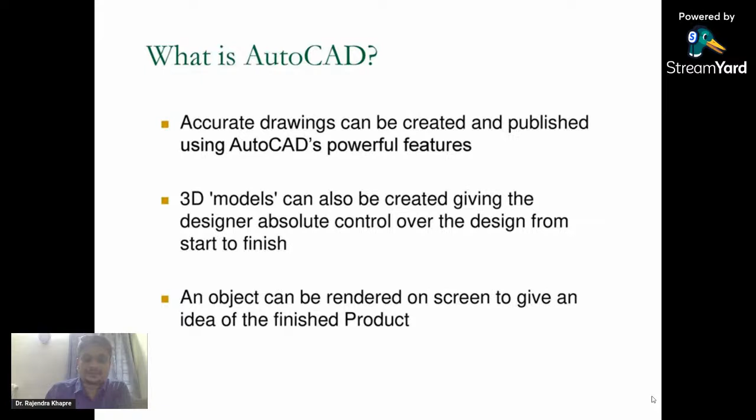Initially it was used for mechanical, electrical, and civil engineering, and later it started being used by architects, aeronautical engineers, and many other disciplines. Accurate technical drawings can be drawn using AutoCAD. The older versions were used only for preparing 2D drawings, but the newer versions now allow us to create 3D models and even rendered views of three-dimensional objects. So I don't have to explain much, because everybody is well conversant with AutoCAD software.

You create your account using your own college ID or maybe even personal ID. And once your ID is approved, you have to upload your ID card also. Your institute ID card has to be uploaded, and once your ID card is approved, you can access many of the softwares which are freely available for students and educators.

Here you will find the download software option, and once you go to that particular window, you will be navigated to a software download window where you can actually download the AutoCAD software in different versions, maybe 2022, 23, or even older versions. This particular version is available only for a couple of years, and after that you may have to uninstall it and install the latest version of your AutoCAD software.

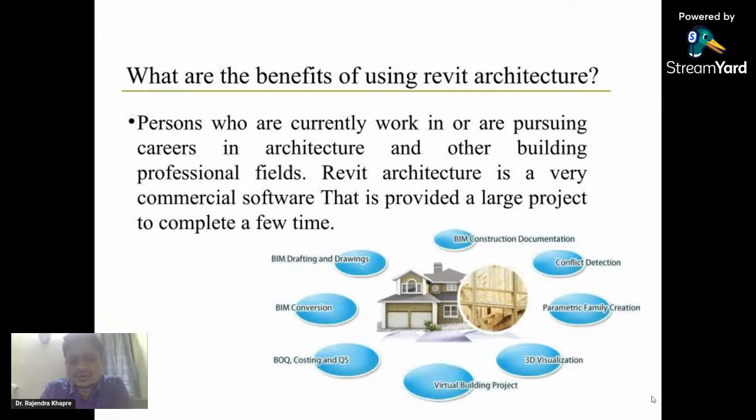Now, what is Revit? I'm sure everybody is aware of this. Revit architecture is a robust architecture design and documentation software created by Autodesk for architecture design and the building profession. Like I said earlier, it works on a platform of BIM, that is Building Information Modeling. In this figure you can see various activities combined under one roof, that is construction documentation, conflict detection, and many more, 3D visualization, virtual building projects. All these are combined into a single software called Revit architecture.

Apart from this, there are some popular softwares related to project management. One is MS Project, and the second one is Primavera. Both the softwares serve almost a similar purpose, that is managing projects. If you talk about MS Project and Primavera, they are basically project management software, and it can be used for a construction project, a small project, or even a big project.

If I talk about Microsoft Project, like I said, it's a project management software developed by a company called Microsoft, and it is designed to assist the project manager in developing plans, assigning resources to tasks, tracking the process or progress, managing the budget, analyzing the workload, and so on.

Now, Primavera also works on a similar platform. For planning the project, you have to define the goals, develop the tasks, establish the timeline, and organize resource availability. Accordingly, the project timeline is defined.

Now coming to the other area, that is hydraulic engineering. Bentley has a bunch of softwares, starting from WaterGEMS, WaterCAD, WaterHammer, SewerGEMS, SewerCAD, CivilStorm, StormCAD, PondPack, and Culvert Master. These are under the umbrella of Bentley, and there are other softwares like EPANET, Branch, Sewer, and Loop. These are the older versions of hydraulic engineering softwares, but nowadays most of the time we'll find WaterGEMS and SewerGEMS in the field. They are very frequently used for the development of water pipelines.

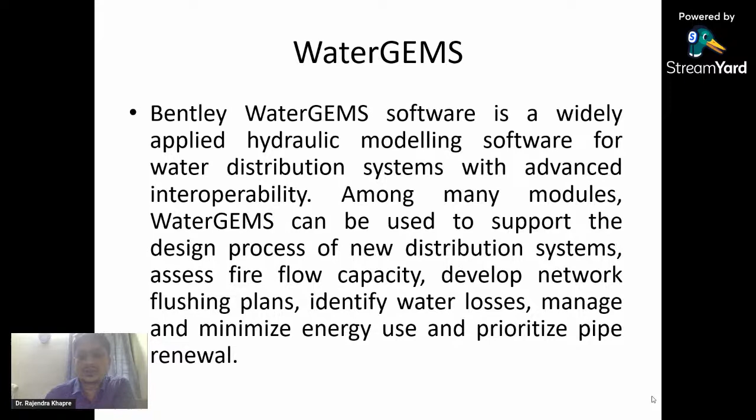Let us talk about WaterGEMS. It is developed by a company called Bentley, and it is widely used for hydraulic modeling, especially the water distribution system, and it has got advanced interoperability. We can plan the water distribution system right from a small village to a large city using this particular software.

This particular software has a very good interface, and it has good integration with other softwares like AutoCAD. Even it has got integration with ArcGIS, and even with MicroStation also. This can be integrated where you can take data from all these softwares, and it can be analyzed in this particular WaterGEMS software.

The next area is soil engineering. In soil engineering, Plaxis software is very popular, and it has two options: Plaxis 2D and Plaxis 3D. Unfortunately, this software is very expensive. Initially it was a property of Plaxis itself, an independent software, but recently Bentley has acquired it. So if you want to purchase this, you can purchase it from Bentley, and it has a very wide range of applications as far as soil engineering is concerned.

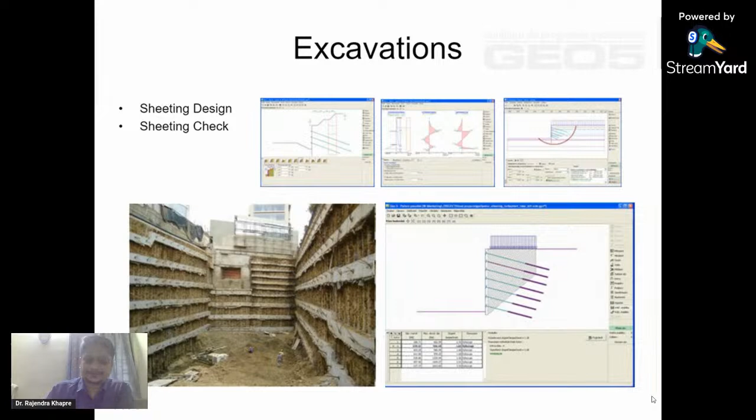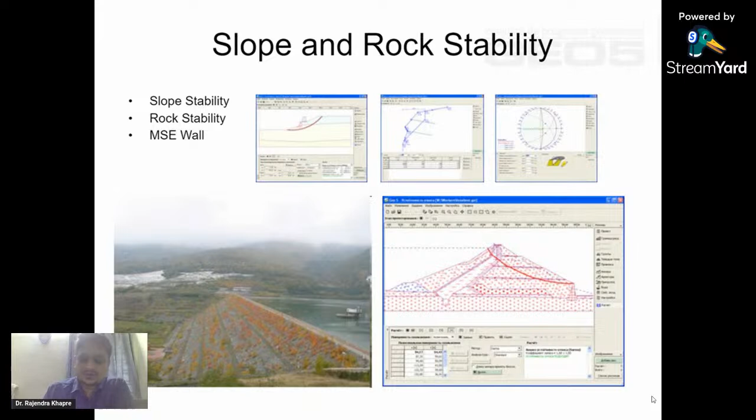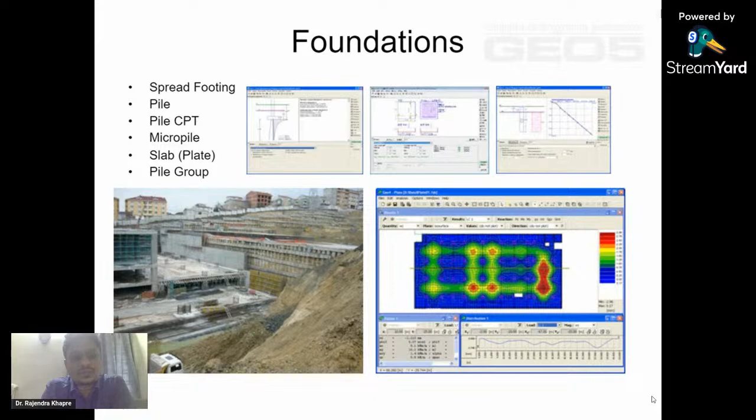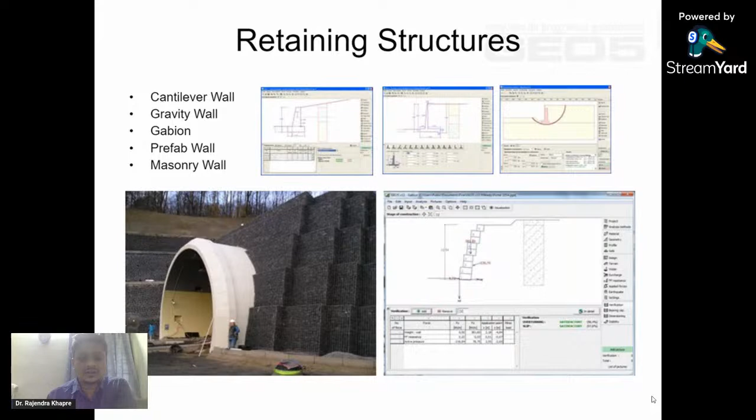Then the retaining module of Geo5 is capable of analyzing and designing cantilever walls, gravity walls, gabion walls, and masonry walls, and so on. You can see in this picture a typical retaining wall designed using this software. Then this reinforced slope can also be designed using this particular feature. MSE wall is one type of wall which can be seen in this picture.

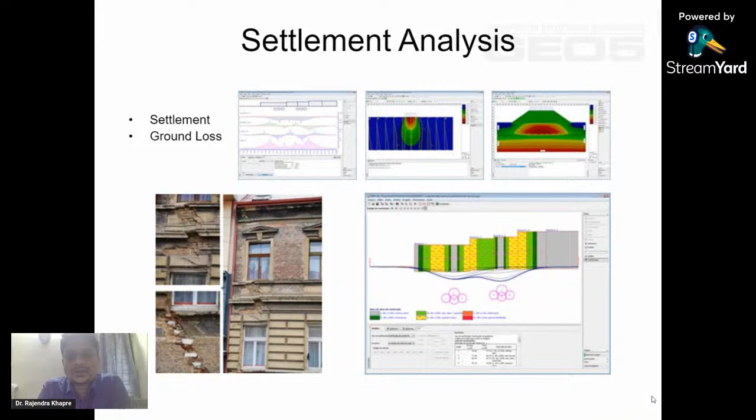Then settlement analysis: due to uneven loading or maybe uneven properties of the soil, there is a possibility of settlement. This settlement analysis can also be done using this particular model called settlement analysis in Geo5.

Now, the most popular softwares used in civil engineering are the structural analysis and design softwares. There are many softwares available in the market, and every software has its own features. To name a few, we have SAP, STAAD.Pro, MIDAS, and ETABS. These are four popular softwares used in India as well as abroad.

Now, if we talk about SAP, that stands for Structural Analysis Program, which is developed by a company called CSI. This particular software has the capability of analysis as well as design of various concrete structures as well as steel structures, well within the permissible limits, and that too as per the latest IS codes.

STAAD.Pro, yes, of course, everyone knows what is STAAD.Pro. It has a very long history over the world. Initially this software was developed by a company called Research Engineers, and during those days the software security was given by a company called Bentley in terms of a hardware lock. Later on, Bentley acquired STAAD.Pro, and slowly Bentley has been acquiring many civil engineering softwares. So in the coming slides, I'll show you what softwares are available under the umbrella of Bentley.

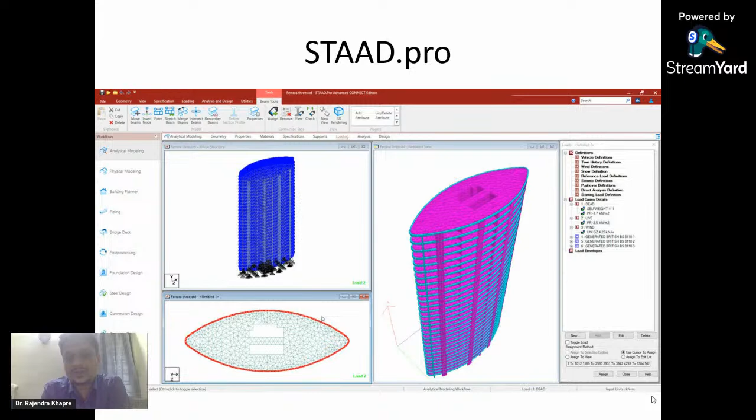To talk about STAAD.Pro, the latest version is the Connect Edition. The previous edition was STAAD.Pro V8i, and this software is very widely used over the entire world. It supports many standard codes, including the steel code and of course RCC code. Apart from that, in some countries aluminum and timber codes are also available. So with this software you can design any building using any of the codes, like the Australian code or American code. All those codes are included, and this software has a very good interface. There are many videos available under the Bentley Learn platform, which I'll show you in the coming slides.

Another software is Midas, which is mostly used in India. This is also a very good software, giving correct results, and it is widely used in regions like Mumbai and Delhi.

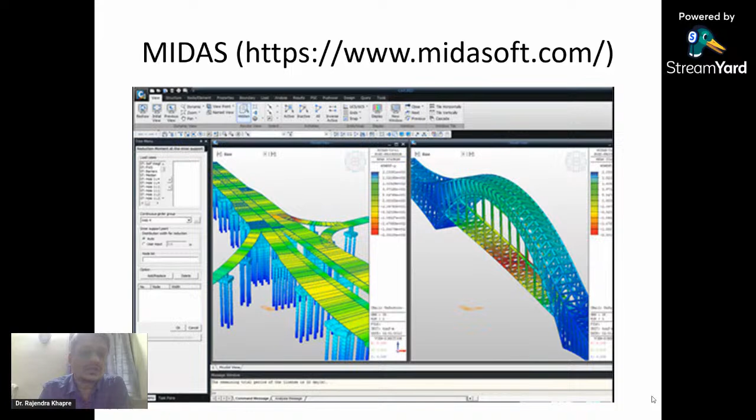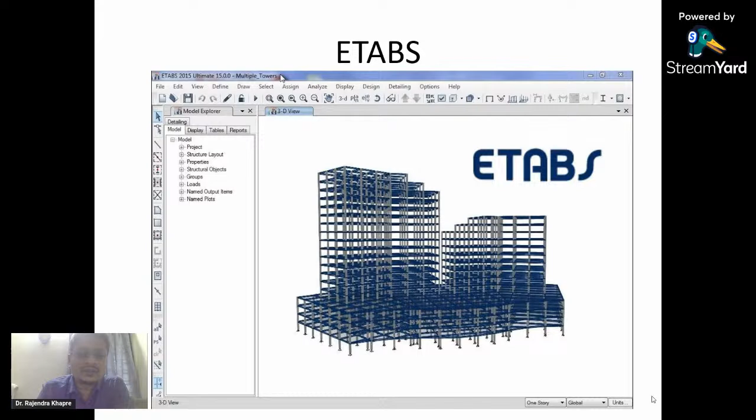Then we have another software called ETABS. ETABS is also developed by a company called CSI, and SAP and ETABS follow almost similar interface. So if you know SAP, you can work on ETABS very easily, and ETABS gives very good results as far as building design is concerned. Whereas STAAD.pro can be used for almost anything. For building design, I'll recommend ETABS, which is very popular in India and gaining popularity abroad too.

Now, this is all about typical RCC or steel analysis and design. When we come to special structures, we have to use a method called finite element analysis. There are many softwares available for this. Even STAAD.pro has a module for finite element analysis, but it has very limited capabilities. To have detailed analysis, you have to use dedicated finite element analysis software.

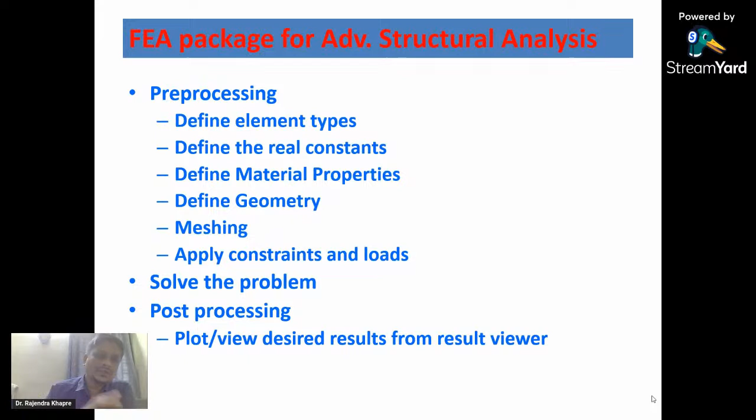There are plenty of softwares like Lusas, Abaqus, ANSYS for advanced structural analysis. I'm comfortable with ANSYS, so let me share some of its best features, most of which are also available in other softwares. Like any finite element analysis, we have to follow a certain process: define the elements, real constants, geometry, material properties, meshing, and then solve the problem. This is the typical structure of any finite element analysis program.

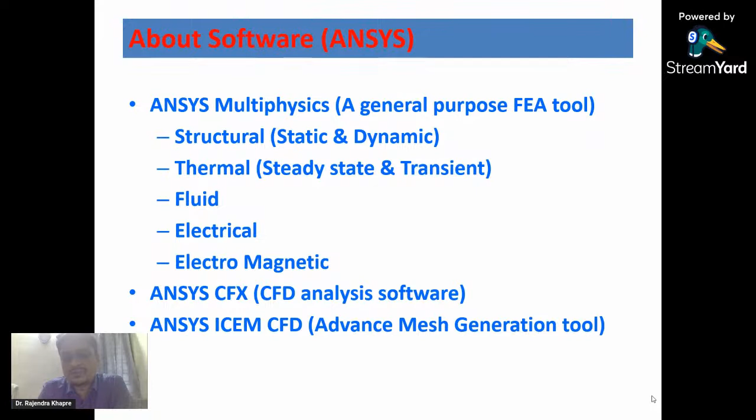Now ANSYS has the capability of analyzing multi-physics problems. This means it can do static and dynamic analysis at the same time, then static with thermal, static with fluid, dynamic with electrical. So combined analysis can be done over here. I'll give you an example in the coming slides of MEMS, that is micro electromechanical analysis.

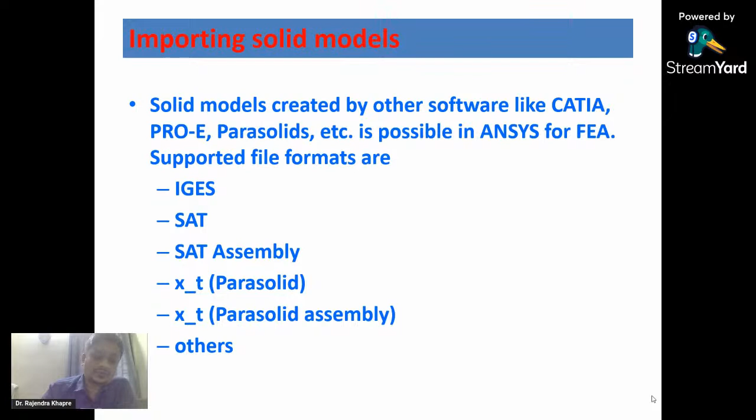There are different analysis and simulation tools available in ANSYS software, like design modeler, meshing feature, design exploration, and many others. These are some softwares which can be easily integrated with ANSYS, like CATIA, Pro-E, Parasolids, where you can create your own geometry and import it into ANSYS, and definitely do further analysis using this.

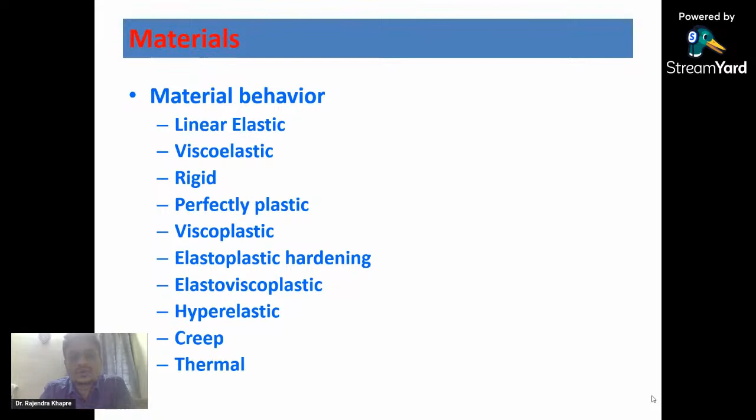Typically, when we talk about analysis, we mostly talk about linear and elastic analysis, where the material is usually considered elastic and the behavior is linear. But there are many different material behaviors we may have to deal with when doing research, like viscoelastic, rigid, perfectly plastic, viscoplastic, hyperelastic, thermal. All these material behaviors are available in the software called ANSYS.

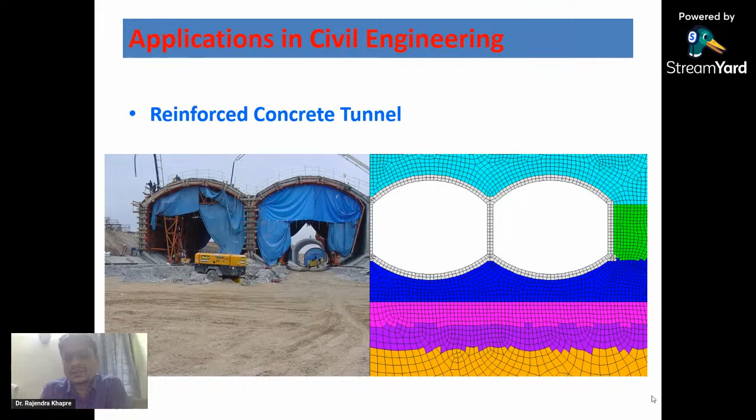Now these are some finite element analyses done using ANSYS. Here you can see a reinforced concrete tunnel, and on the yellow side that's a rock, pink color is different soil, blue color is filling, and white color is concrete. So different material properties are analyzed in this particular figure.

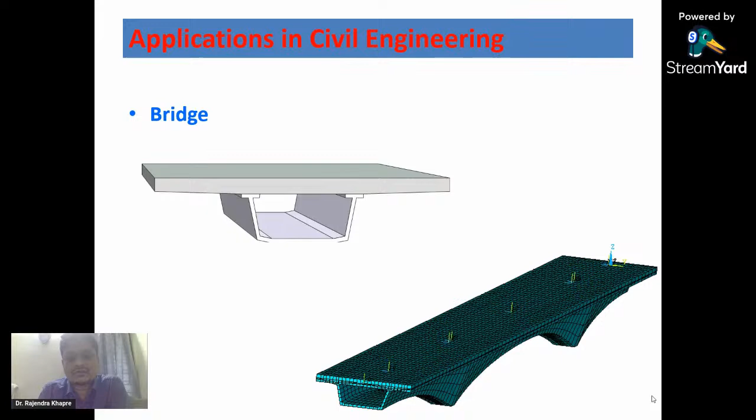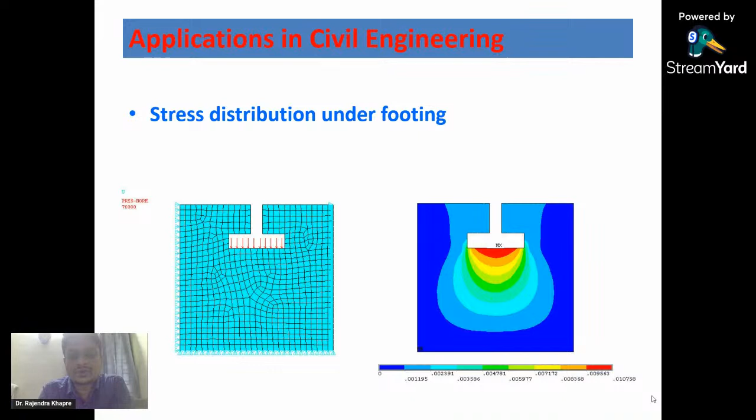We can even have soil analysis in this particular software. Like in Geo5 we can do this analysis, the same can be done over here. There are different soil models available in this software, using different soil models, like the Mohr-Coulomb model. In this Mohr-Coulomb model we can have the pressure distribution under the foundation. So this is one example.

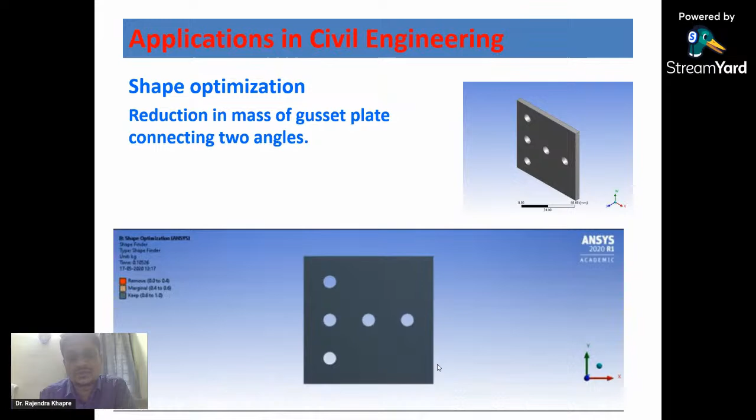We can have a plate something like this, and the corners can be removed, but still the structure will be safe, and the weight of the structure will be reduced.

We can even analyze complex structures like castellated beams, where we have a steel section with some openings made to pass ducts, pipelines, or maybe water. IS code does not give a design procedure for such members, so we can do an analysis and see how the structure is behaving. We can even model the reinforcement in this particular structure.

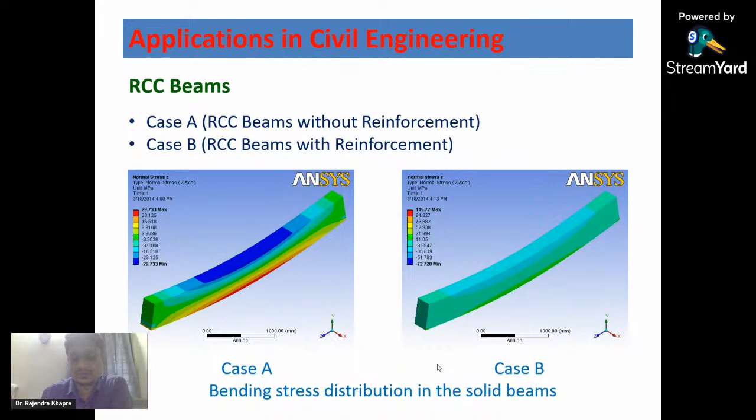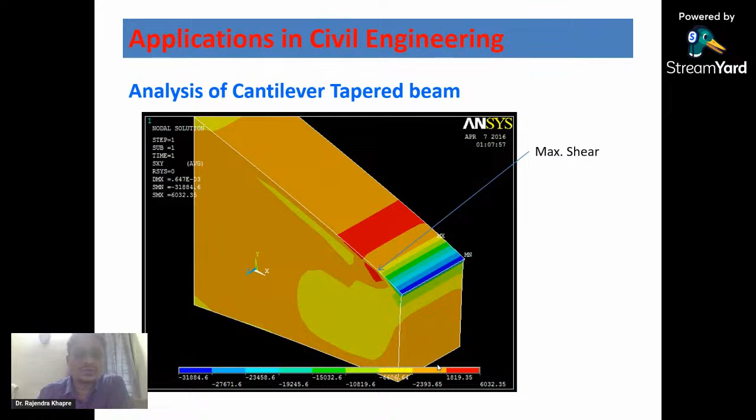Then some special cases like cantilever beams, or deep beams I should say. Especially in deep beams, usually it is considered that the maximum amount of shear is coming at the support, isn't it? But if you consider the deep beam, you will find that the location of maximum shear has shifted. This analysis is possible only using a finite element package.

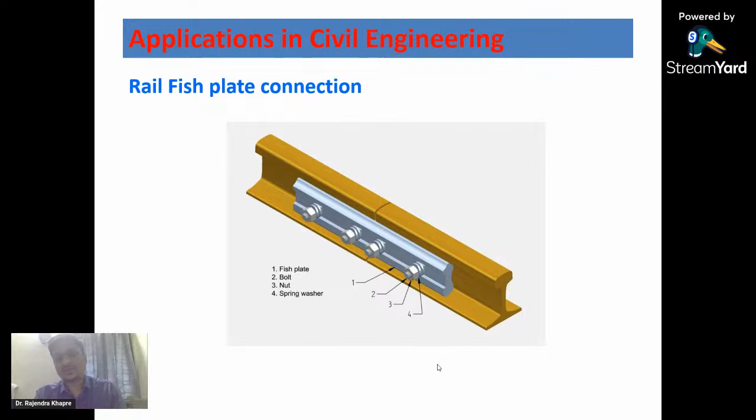Now, if you want to analyze a complex shape like a rail fish plate connection, the one shown in silver color - this is a typical plate used to join two rails, and due to the influence of load, this will be subjected to high amounts of stress. Typically there are three types of fish plates used in Indian railways nowadays, and all these are modeled separately.

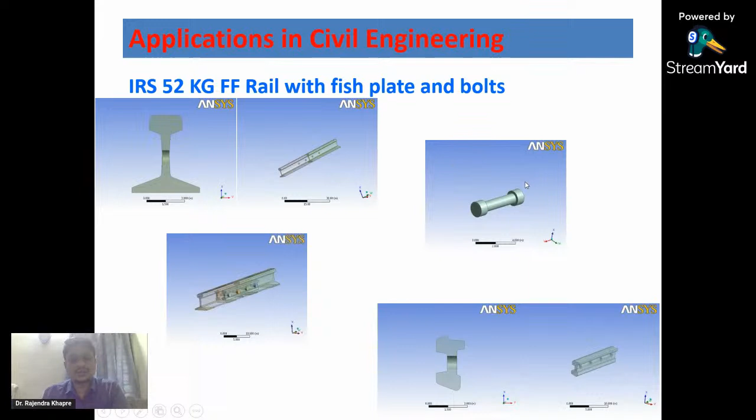Over here we can see this is the rail, this is the fish plate, every nut is there, and this is the complete assembly. This was analyzed for the moving load of the standard rail axle, and you can find a deformation pattern - here you can see the deformation is larger at the joint.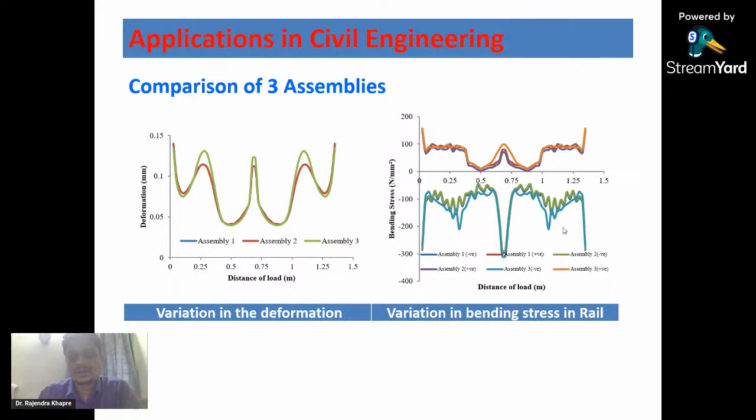Now another interesting part is the thermal analysis. Whenever we are going for mass concreting, where mass concreting means the depth of concrete at the time of casting is probably 0.5 meter and higher - during this case, because of the huge amount of concrete, the heat of hydration generated is also very, very large.

So we have to provide sufficient provision for water inside the body so that the temperature can be controlled. This study can be done for different types of shapes, because different shapes will cause the maximum temperature to act at different locations. If you know the locations, you can put a pipe there and supply cold water so the temperature can be controlled.

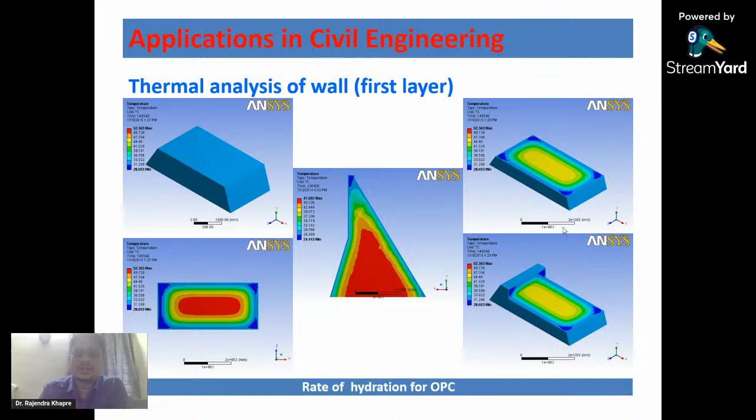Now, another analysis is the thermal analysis of a building, and this is one picture where the building is completely modeled in ANSYS, and it was analyzed for 24 days. You can see there is a significant difference, roughly 8 degrees temperature difference inside and outside the building model.

So you can study this, like for example, if you provide insulation on the northeast side wall, or on the roof, what will be the temperature variation inside the room. Accordingly you can design the insulation - where it has to be kept, what should be the thickness - and the temperature can be controlled. This type of analysis can also be done in this software.

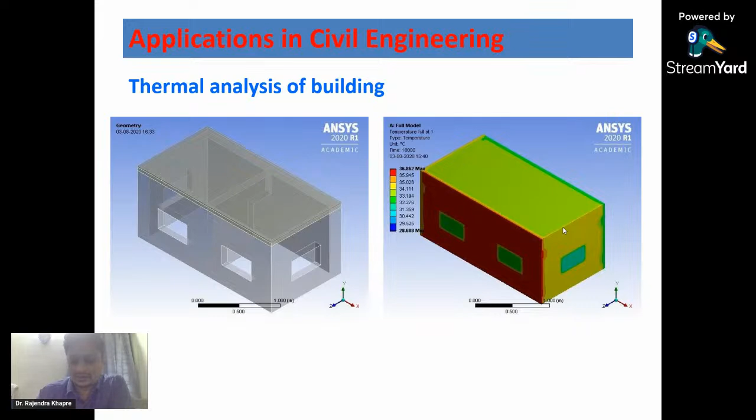Mostly we are dealing with a material which is linear and isotropic in nature, but sometimes we may have to deal with an orthotropic material. So what does orthotropic material mean? The material properties of the given material are different in the x direction, different in the y direction, and different in the z direction. The best example of such a material is ply.

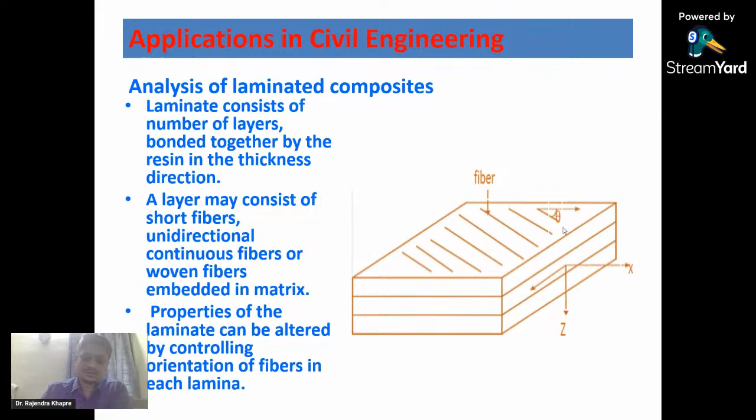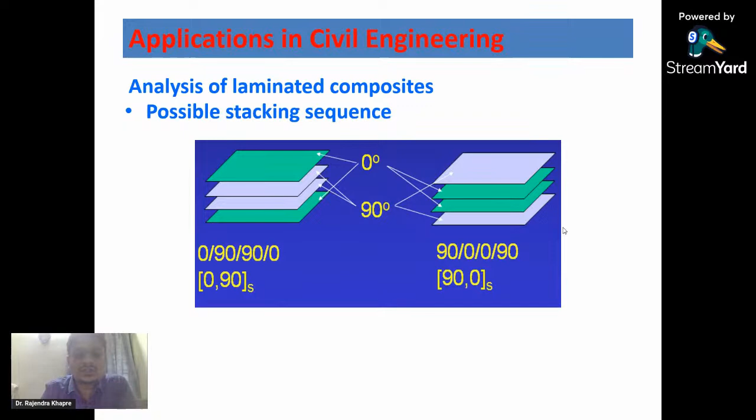The fibers of the material are not in the same direction, they are layered, and the direction of those fibers is different for every layer. In this picture, the green ones show 0 degree, and the white ones show 90 degree. The orientation of these fibers, whether parallel to X or parallel to Y, changes the entire behavior of the structure.

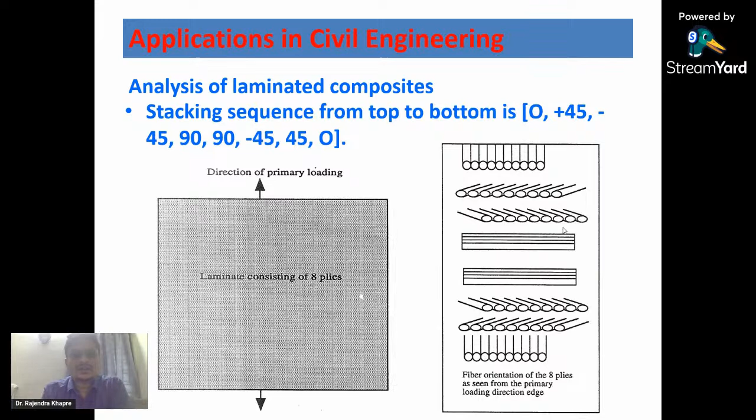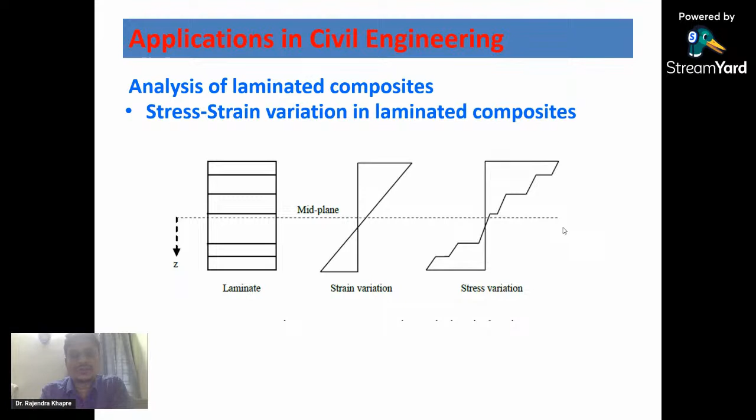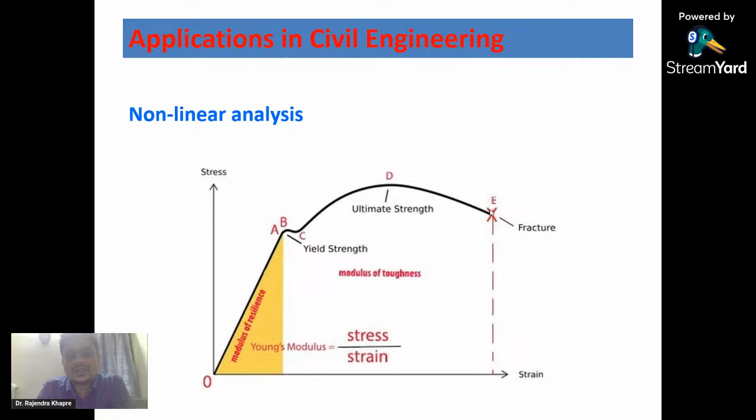Such type of analysis can also be done here. Usually we talk about linear analysis where the stress-strain curve is linear, but in most cases, especially in failure analysis, we may have to cross this linearity and enter the domain of non-linearity, where stress and strain are no longer proportional to each other. On this screen, you can see a typical stress-strain curve for steel, where linearity holds up to the yield strength. Then there is a reduction in strength, followed by an increase, which we call the ultimate strength at point D, and at point E it fractures.

This is a typical representation of the finite element analysis of a bar, which is stretched until it breaks. This is a typical example of a non-linear analysis.

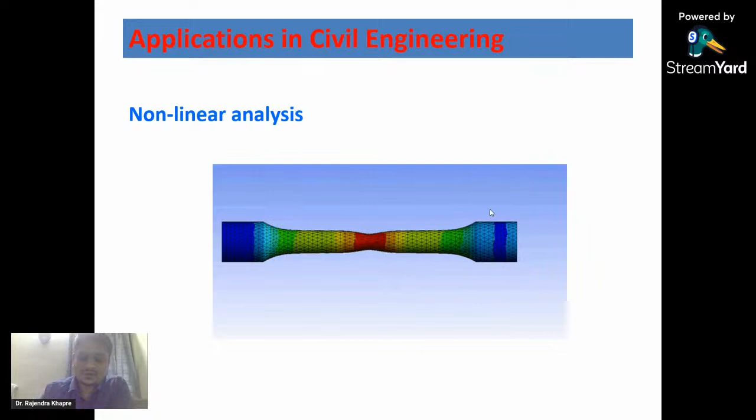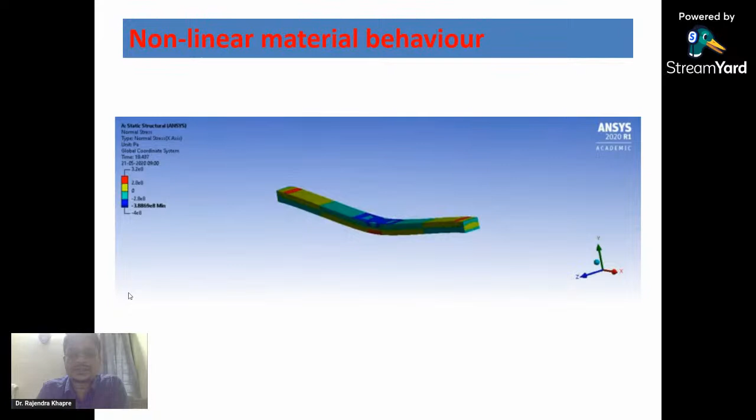Another non-linear analysis is this one. This is a typical beam fixed at both ends, subjected to a concentrated load. Once subjected to concentrated load, under the load there will be a plastic hinge formed. This plastic hinge creates stresses beyond the yield stress, and there will be a permanent deformation at that point, but the rest of the material will remain within the elastic limit.

This is the typical material behavior under nonlinear conditions, especially when we talk about crushing. Here you can see a rectangular tube which was crushed and has become the shape of an 8. This is a circular tube, also crushed, and this circular and rectangular tube is crushed vertically.

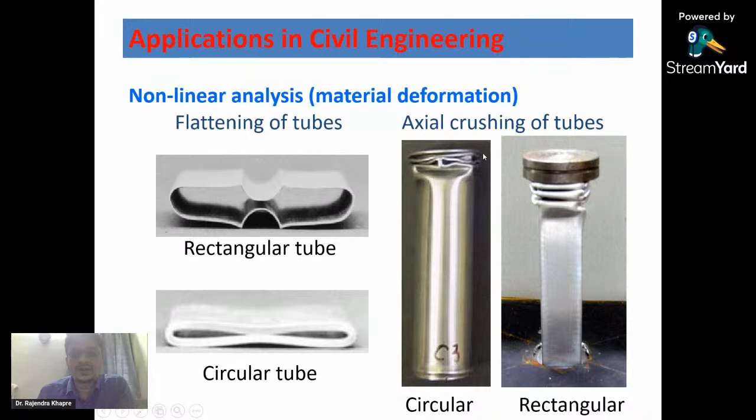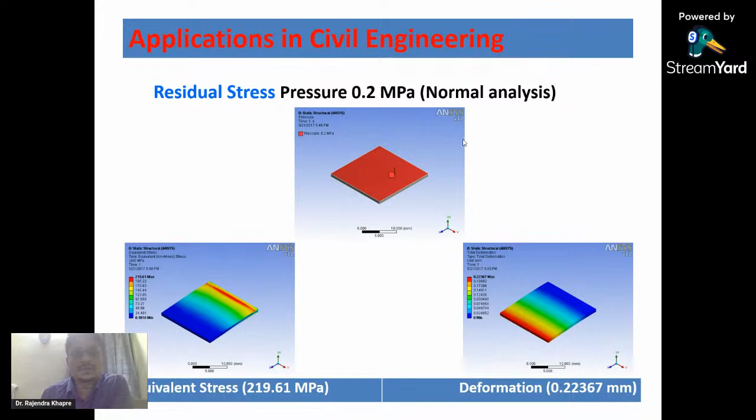Another example is residual stress. If you take a simple cantilever beam, apply a load, and then remove it, it will go back to its original position. But after a certain magnitude of load, it will permanently bend, and some amount of stress will be introduced in that cantilever plate and remain there, not going back to its original position. That is what we call residual stress. We can analyze residual stresses also by using the material nonlinearity option.

This is what I was talking about, the micro electromechanical system, MEMS, and this is the perfect example of multiphysics. In multiphysics, three problems are combined in this case. This is a bar having two different metals: the bottommost is the copper alloy, the top one is the aluminum alloy, and there are three locations, A, B, and C.

At A, we are applying a basic temperature of 30 degrees, and at B and C, there is a difference in voltage. Especially in electronic gadgets like cell phones, there is a huge amount of voltage fluctuation, because at one corner there will be voltage, and at another corner there won't be any voltage. This difference in voltage at two different locations is going to create a rise in temperature. So here the input is voltage, but the output is rise in temperature. These are two different things: voltage is the electronic part, and temperature is the thermal part.

Due to rise in temperature, there will be expansion of the material, and due to expansion, there will be stresses. So here you can see we are dealing with three different physics: one is the electronics, then there is the thermal, and there is the structural. That's why it is called a multi-physics problem.

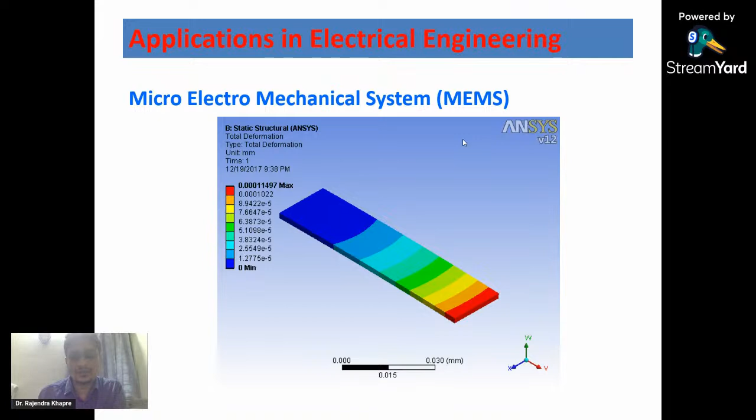Now this finite element analysis is not only limited to structural, thermal, and electrical, it has entered into the world of biomedical engineering also. Many of the biomedical implants can be designed perfectly if you do the finite element analysis correctly.

The simple example is your tooth cap. If you have a tooth cap model available with you, definitely you can go for the structural analysis of this tooth cap, and you can see whether it is able to sustain the given loading or not. That can be easily analyzed using a finite element software.

Another example is your bones, like especially in some accidental cases, the bones are fractured. Sometimes you may have to replace the bone, and sometimes you may have to go for attachment of plates. So we can have the analysis of this attachment of plates, and maybe a dynamic analysis using ANSYS for the femur bone, and we can see how this bone is going to distribute the stresses over the body.

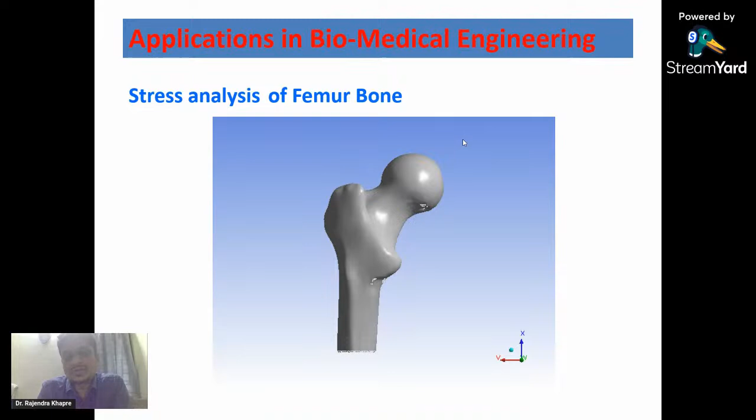Just imagine some construction is going on, and heavy construction material is falling on the slab. Although your slab is designed for a certain load, due to the impact, this load is increased tremendously, and you may find there is damage in the slab. Such type of analysis can be done, and we can see whether the slab will sustain the external loading or not.

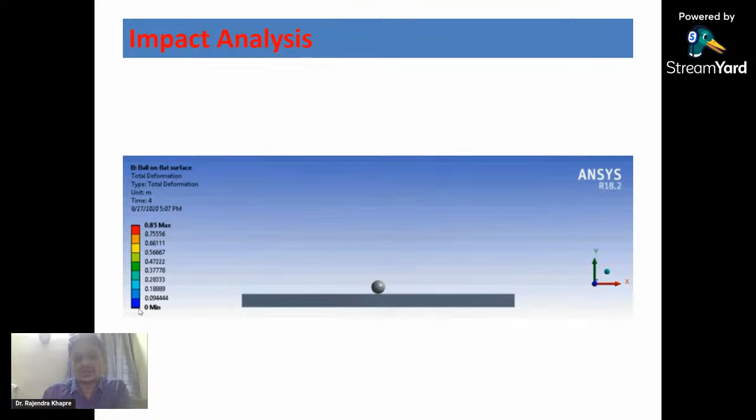Apart from this, we have a buckling problem. For example, if you see this particular column, under the application of the vertical load, it should behave like this—it should compress axially. But in practice, it starts buckling because there is a difference in the moment of inertia along the x-axis and y-axis. So in place of axial compression, you will find there is buckling.

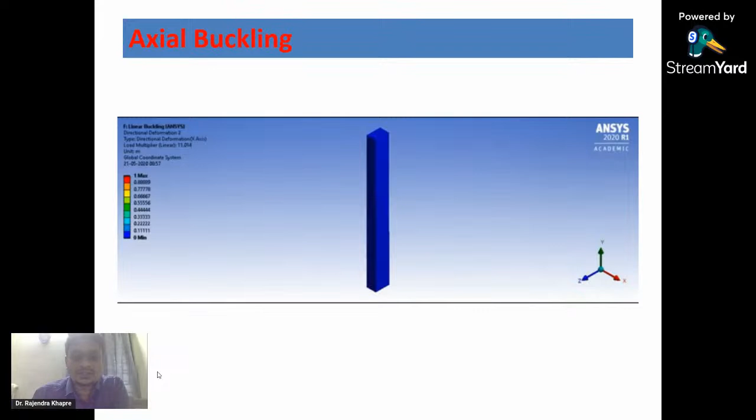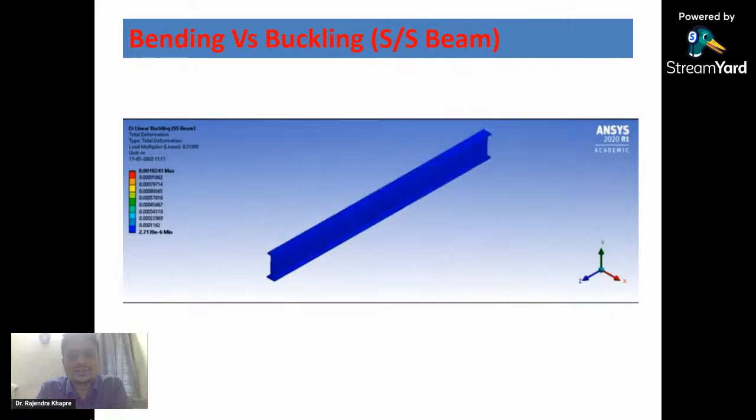These are the real life problems which can be analyzed here. Another example is the buckling of the I-section. Ideally the I-section should behave like this, but actually it is behaving like this. This is what we call buckling.

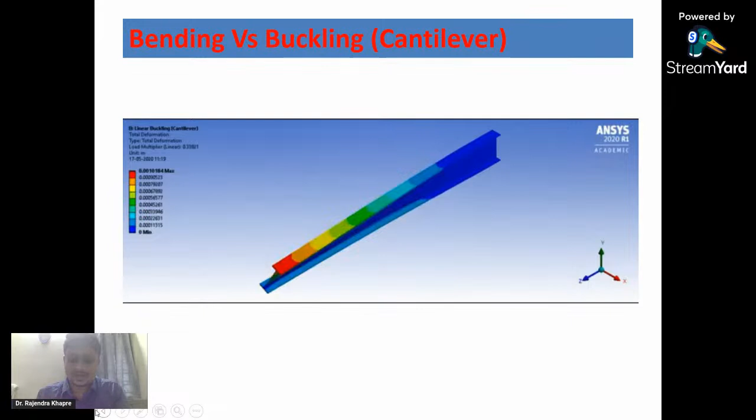Another example of buckling is your cantilever. You can see the cantilever should behave like this under the given load, but in real life the I-section is behaving like this under the application of load. It will tend to buckle after a certain amount of load. So this buckling behavior can be analyzed easily using this finite element package.

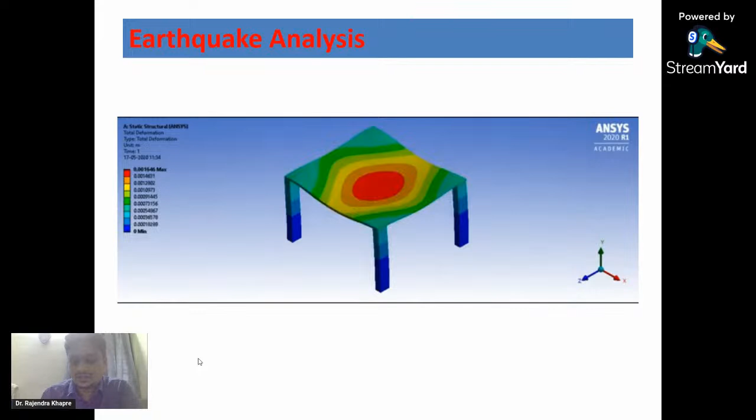Now, earthquake analysis—yes, of course, STAAD.Pro, ETABS, and everything is okay. But here also you can have the analysis which is subjected to earthquake loading. So we just have to give the proper input, and we can see the structure dancing at various frequencies.

So in harmonic analysis, you can see this is a typical plate which is moving in the vertical direction. And then the second mode shape is like this.

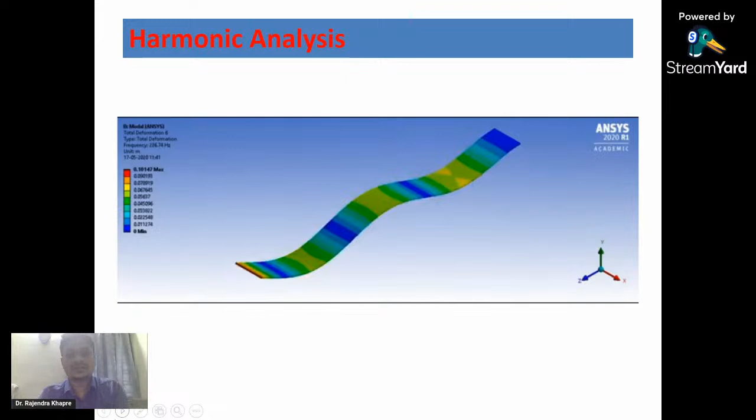Basically what happens is when the frequency of the load and the frequency of the structure match, resonance is created. Due to resonance, the deformation caused by external loading is increased tremendously. So we can do this analysis and find how much resonance is there, what is the natural frequency, and what will be the maximum deformation, especially in case of resonance, for different frequencies.

Now, this is something new, because till now we were designing buildings for different types of loads, maybe self-weight, live load, thermal load, wind load, earthquake load, and so on. But nowadays, this impact load, especially due to explosion, is coming into picture. This can be a disaster like the Beirut explosion, or a man-made disaster like a missile explosion.

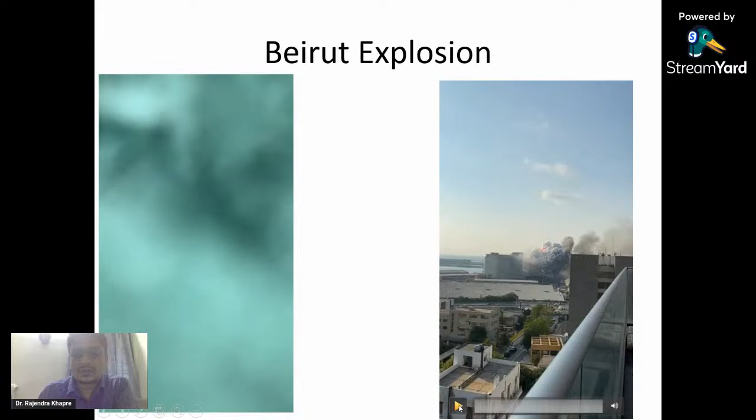So let me play this video for you. Here you can see there was ammonium nitrate which was stored in a storage facility, and it got exploded due to the fire. I think this event happened during the COVID period, probably in 2020.

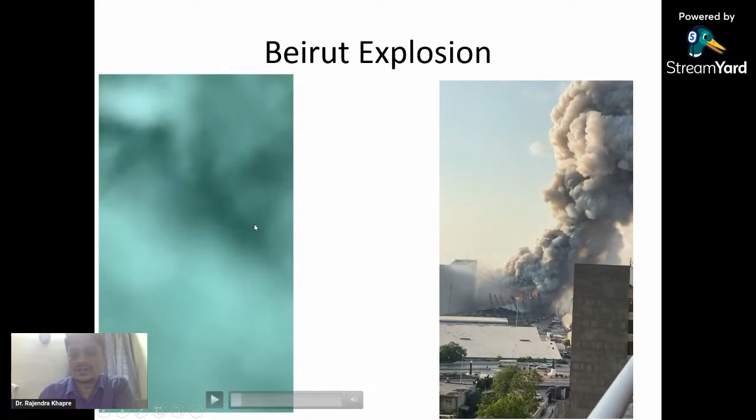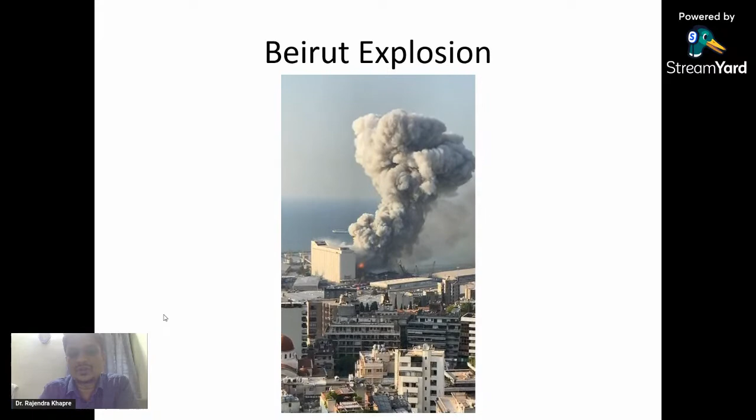This explosion happened, and the entire world witnessed it. The amount of explosion was such that many of the buildings in Beirut city were destroyed. Let me show you another video so you can see the effect of the wave. Just imagine what could have happened to the building next to that storage vessel. You can see there is an actual wave going out due to the explosion.

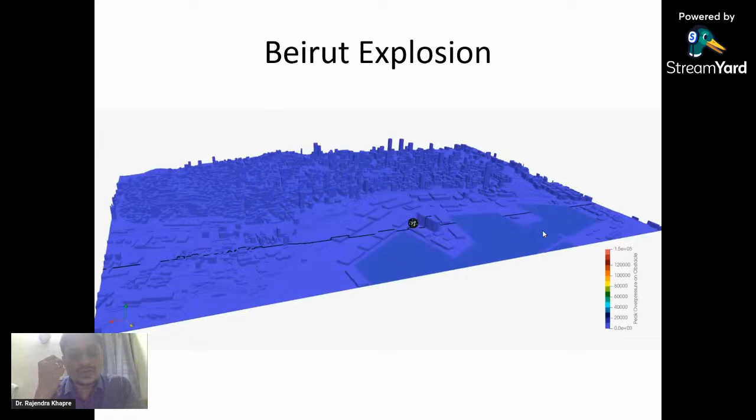We can do this analysis in software, maybe not in ANSYS, but maybe in Abaqus. This is a simulated version of that explosion. You can see the entire city was modeled, and the damage assessment was done due to this explosion.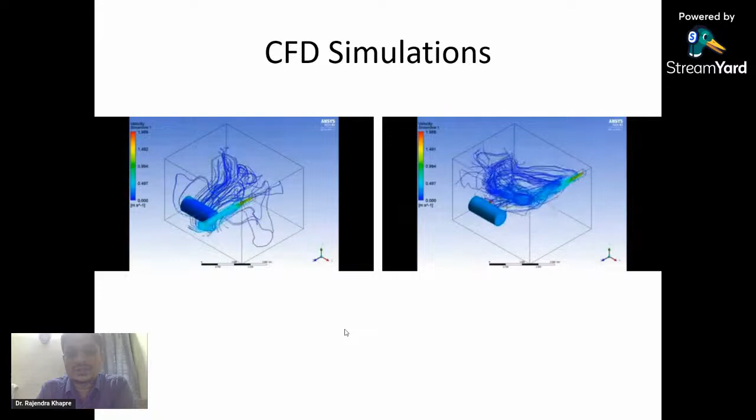So the concepts of CFD come into picture here, and we can do various analyses using fluid, because air is also considered a fluid. So this is one such example.

Now the important part is reality modeling. This is something new. Whenever you want to do analysis on real life problems, you have to create the 3D model of that real problem. There is one such software called Context Capture, developed by Bentley. How this software is used is, you have a specimen or a building, and you can create pictures of that building or specimen from different angles, like A and B, as you can see here.

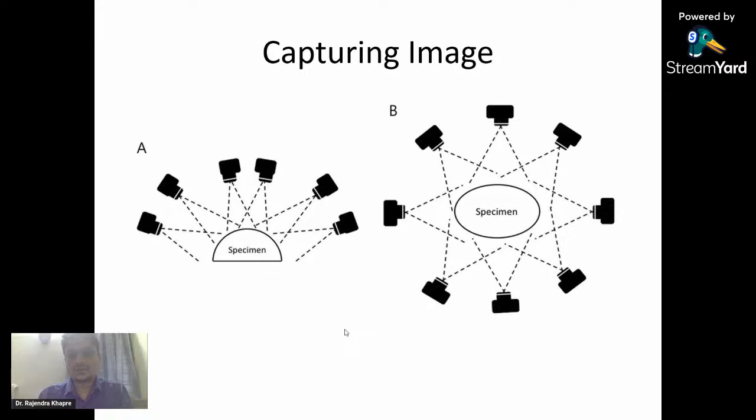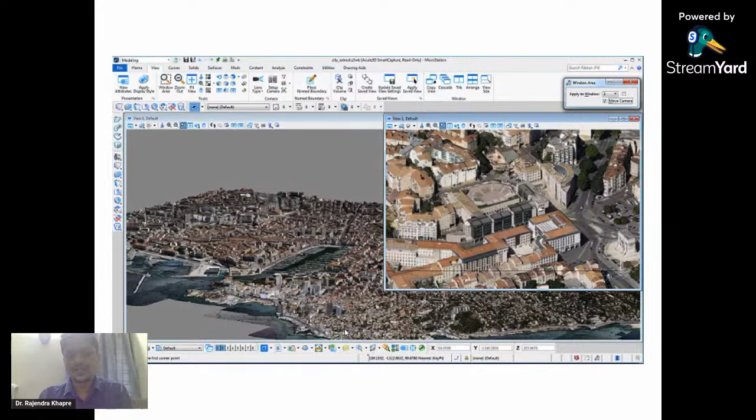Now this software will stitch those pictures and create a 3D model out of it. So this is one 3D model created by Bentley using Context Capture. With the help of a drone or helicopter, various pictures are taken of the entire city, and all those pictures are stitched together to create a 3D model. The best advantage of this 3D model is that you get the correct elevation and correct dimensions of the entire structure.

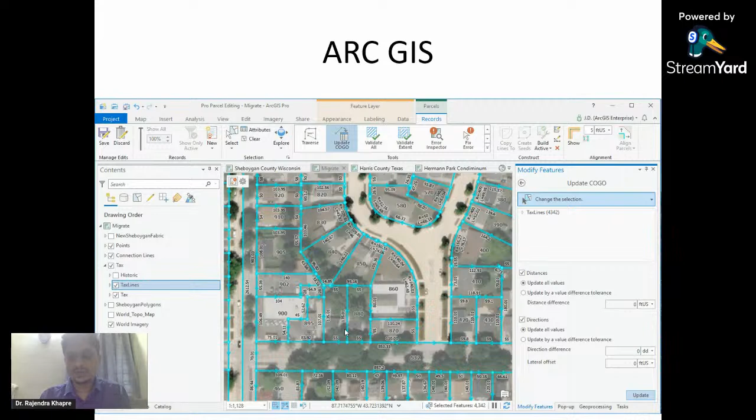The same thing can also be done in a software called ArcGIS. This is very much essential, because nowadays something like the Beirut explosion cannot be simulated unless you have the correct model of the entire building. It is really difficult for us to simulate that otherwise.

Apart from that, Bentley has different software. Like I said, Bentley is the leader in various civil engineering software.

So they are categorized under bridge analysis, probably bridge design. Then we have civil design, with different packages. Then hydraulic and hydrology, which I have already explained. Then mine design, modeling and visualization, offshore analysis, plant design, and reality modeling. And of course the structural analysis where STAAD.pro, STAAD Foundation, and Pro Steel all come into picture.

Now, like I said, Bentley offers many civil engineering softwares. So how to learn them? The simplest way is you go to the Bentley website, education.bentley.com. There you will find a login symbol. You just have to create your ID there, and once your ID is created, you can directly go to the window for students and click get training.

Once you open that, you will find trainings related to various softwares, even on STAAD.pro, then WaterGEMS and many more. You complete that training and you will get a certificate also.

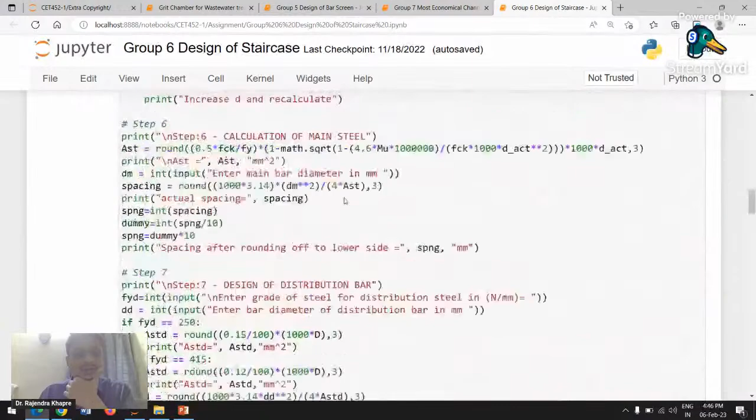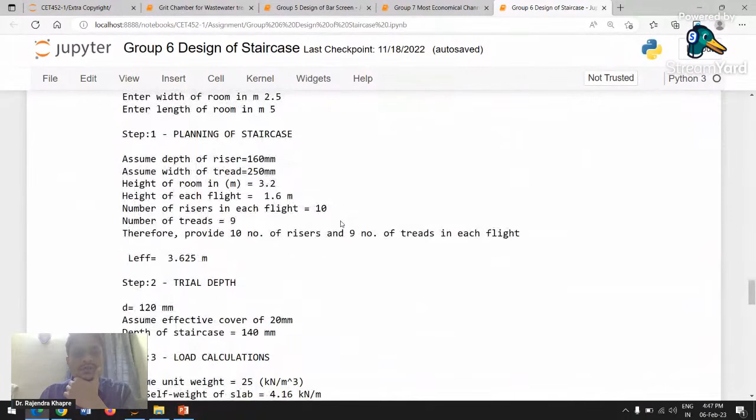So let me quickly show you some Python programs. Here you can see this is a simple Python program developed by a few students, and it is very much similar to a C program. It's a lengthy program, but if you look at the output, traditionally what is expected is the text output—what is the riser, what is the tread, and so on.

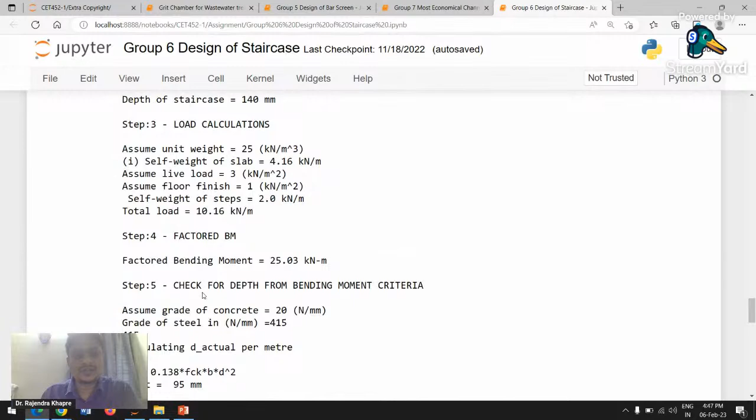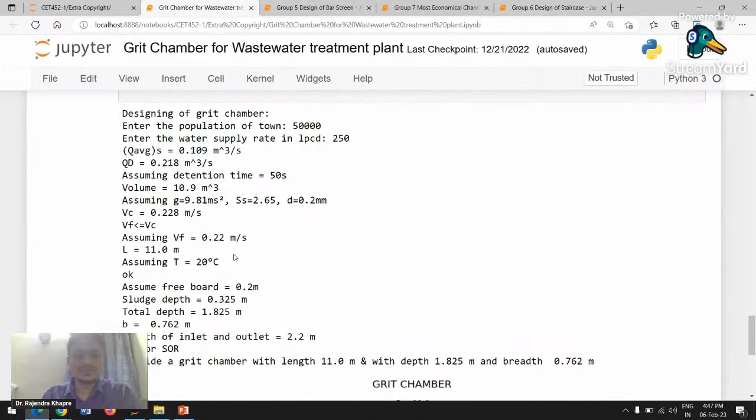Here you can see this is the design of a grit chamber. This is the text output which you traditionally get in any programming language, maybe C or Fortran. But in case of Python, you will also get the drawing if you do the drawing part. This is one such example, the design of a bar screen.

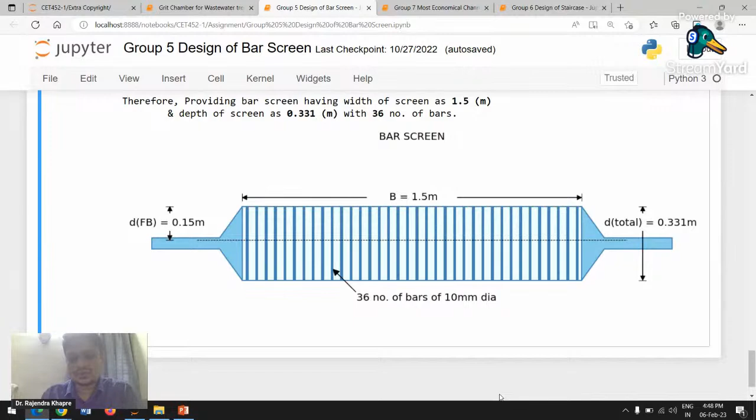These are very small programs, and here you can see the text output, design of bar screen, and this is the pictorial output. The beauty is you just right click on this and you can copy the image and paste it in any report. Even this report is printable—all these images are easily printable.

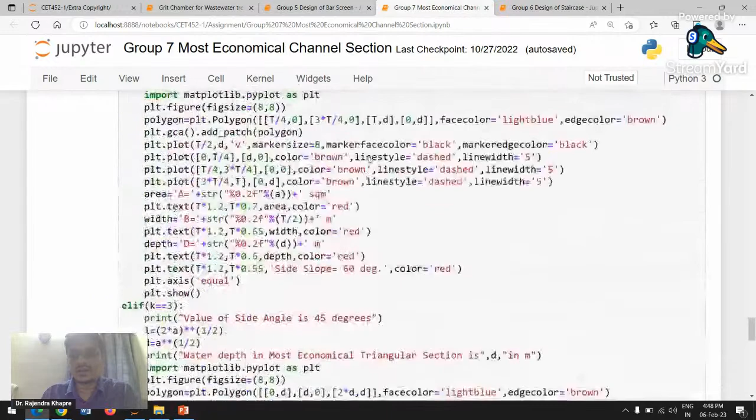Now this is the most economical channel section. This can be a triangular, or there are many others, okay, rectangular. So all these things are really possible with the help of a program.

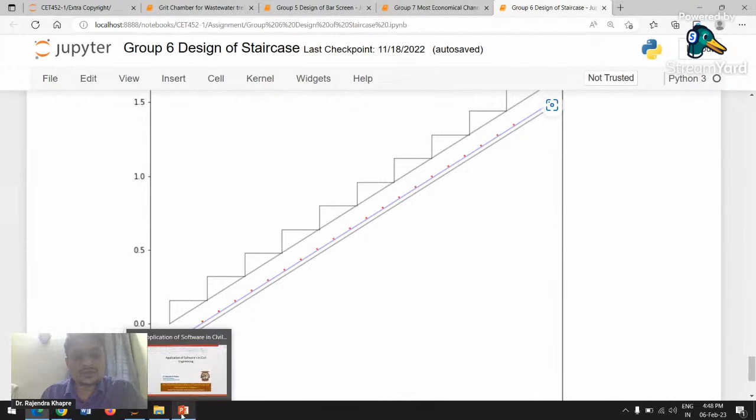There are many courses available on the Coursera platform, and even NPTEL, especially on AutoCAD. There is a course on Coursera; I'm sure you will find it. Please join them and learn the softwares, and it will definitely help you a lot in improving your careers and understanding the latest trends in civil engineering.